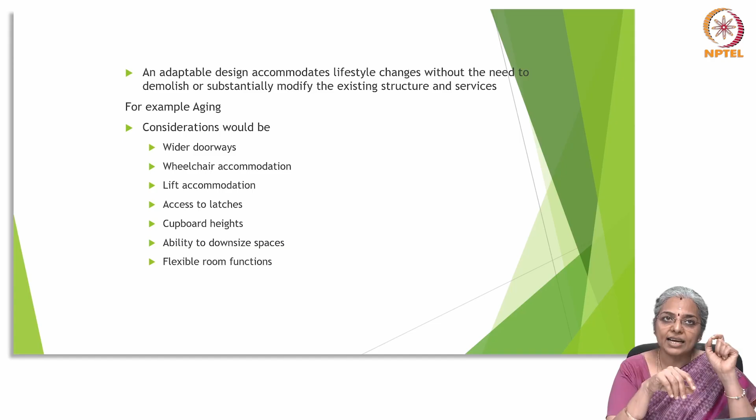So, an adaptable design should accommodate lifestyle changes without the need to either demolish or substantially modify the existing structure and services. As an example, if we are designing a house where the inhabitants are bound to be aging, what considerations should we give? We should look at giving wider doorways, because once they become less mobile, they may need a walking stick or a wheelchair, for which the doorway should be able to adapt.

Then there should be wheelchair accommodation, a facility where people can move within the house freely on a wheelchair. Then accommodation for lift, because sometimes if a person lives on the first floor, when they are young they don't need a lift, but when they become senior citizens, sometimes they may need a lift.

Or even if you look at a small clinic, when it begins to grow and they start moving to the first floor or second floor, they need lifts to take their patients to higher floors. So it should be able to accommodate a lift.

If it's for the aging person, then access to latches. They no longer can actually stretch their hands too far and operate the latches, so latches should be accessible to the senior and the elderly. And the same is with cupboard heights and cupboard handles.

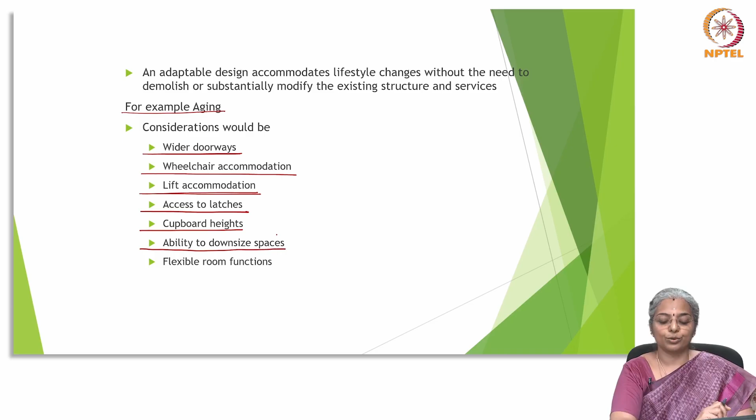Also, as the household starts to shrink, we should be able to downsize the spaces and make flexible room functions.

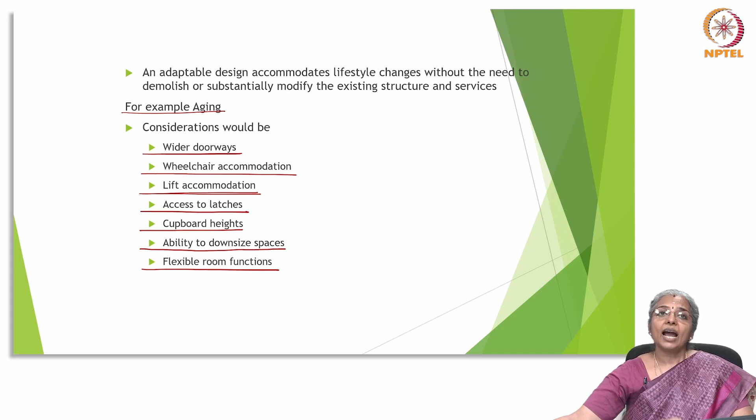Now we will come to another concept also, which is disassembly of buildings. So I'll go back and forth on these two terms. A disassembly friendly design is a very important part of circular construction. In fact, that's one of the first prerequisites for circular construction, in which waste can be minimized and it can be optimally recycled.

Now, if buildings were deconstructed instead of demolished, the consumption of construction material can be reduced, and because of that, the depletion of primary resources will get reduced, because of which environmental hazards will get reduced, and also climate change will slow down dramatically.

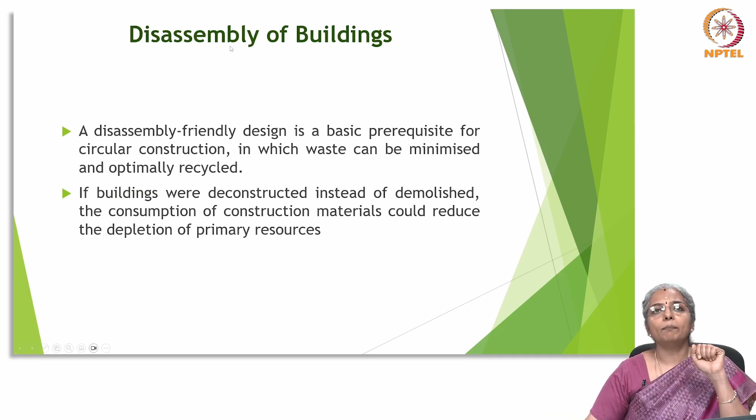Now, why should we aim for complete recovery of building materials? And how can we achieve this complete recovery of building materials? That can happen by, first, documentation of materials and the method of deconstruction.

Second, when I say documentation of materials and methods of deconstruction, it could even be that you actually have to start your designing and drafting for deconstruction, and then give a plan for how the building would actually look when it is put together. So you are actually doing the reverse of what we are doing now.

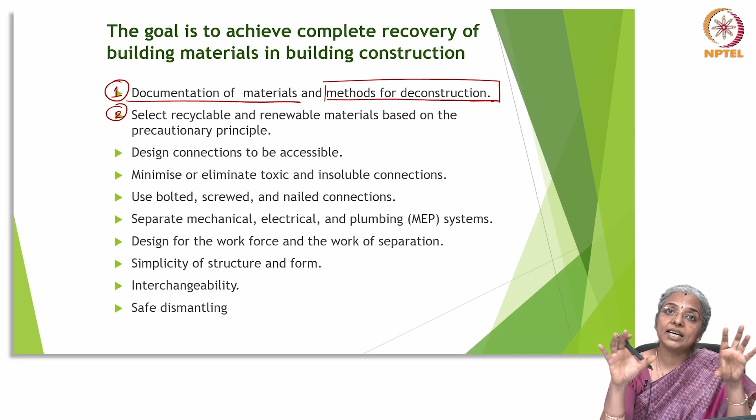Today we design, we build, and then once the use is over, we demolish. But here what I am saying is, you first look at how you are going to deconstruct a building, and then look at how you put it together to achieve the design that you want.

Second is to select recyclable and renewable materials based on the precautionary principle, so that you don't have to waste too much of it when you deconstruct, and you are not causing too much environmental damage and hazard. Very, very important.

Third is design connections to be completely accessible. So you can't have an element in a building and then not know how to dismantle it. You should know the joints and they should be clearly visible, and that is when it can be dismantled.

Fourth is minimize or eliminate toxic and insoluble connections. So what that basically means is components should be dismantled easily without applying anything that could be toxic, or anything that could be so rigid that it is difficult or impossible to dismantle.

Therefore, use bolts, screws and nailed connections so that it can be easily dismantled, it can be visible, and it will be strong.

Sixth is separate the mechanical, electrical and plumbing systems so that you don't have to segregate anything. It's all already segregated and installed in the building.

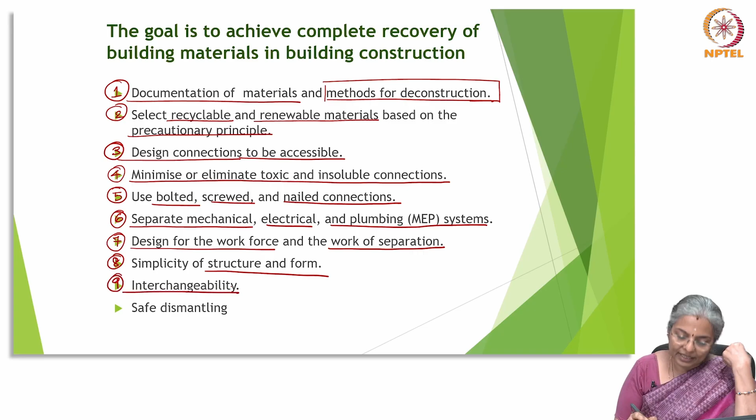Eighth is have very simple structures and form, so it's obvious how you can dismantle it. Ninth is interchangeability and therefore modularity.

Swapping modules should not really change much. And tenth is safe dismantling. While dismantling, it should not cause hazard to the human being.

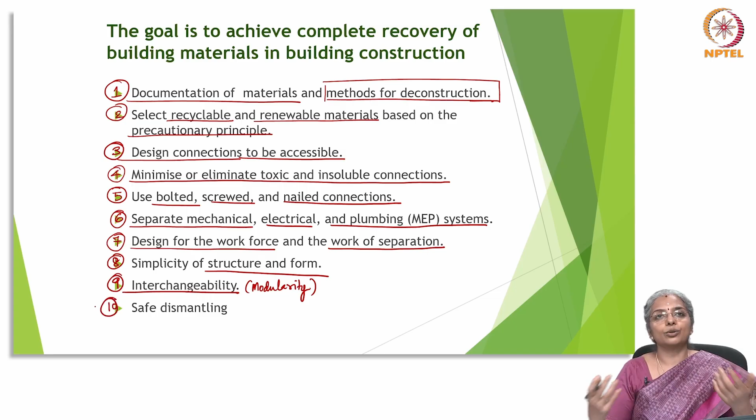Now, what all can design for disassembly lead to? First, it can make designing very flexible for multi-use, so more people can use it. Second, it should be retrofittable.

If any panel or board is damaged, or say for example any tile is damaged, you don't have to remove the entire flooring, you can replace only that tile. That is retrofittability. And then deconstruction of the entire building should happen easily.

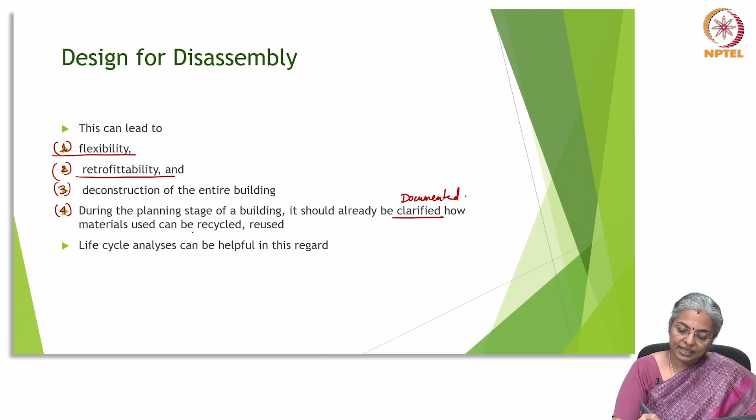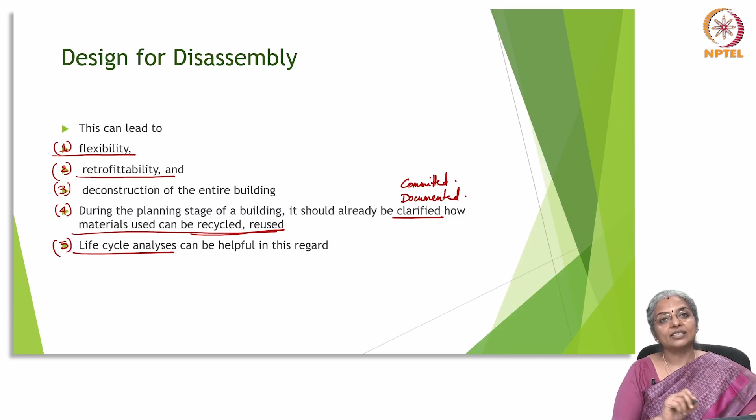During the planning stage of the building, it should already be clarified or documented, even committed, on how materials can be recycled and reused. In this case, life cycle analysis can be very useful.

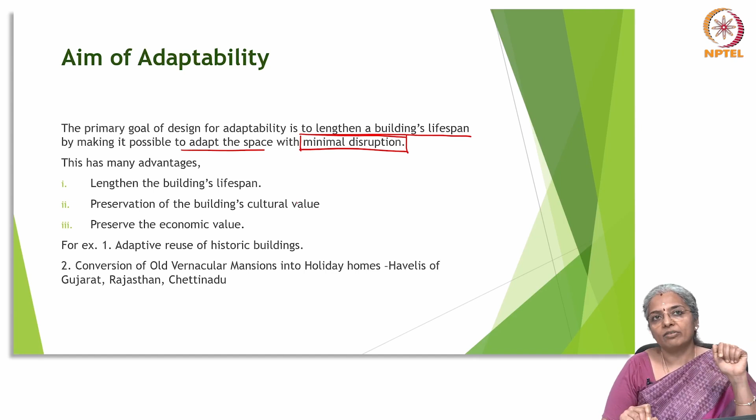Now, if we look at adaptability, why should we go for it? What is the aim? The main aim of design for adaptability is that we should be able to lengthen the lifespan of the building, because we will be able to adapt the space with very minimal disruption.

What are the advantages of adaptable design? First, it can lengthen the building's lifespan—you don't necessarily have to demolish a building to suit future requirements or use. Second, you can preserve the building's cultural value and sentiment, because you are not pulling down the entire building. Third, you can preserve the economic value, because demolition and rebuilding can be a very expensive exercise.

An example concerning point number two is adaptive reuse of historic buildings. Let us look at a couple of case studies. For example, old vernacular mansions getting converted into holiday homes, such as the Havelis of Gujarat, Rajasthan, or even the houses of Chettinad, which undergo adaptive reuse.

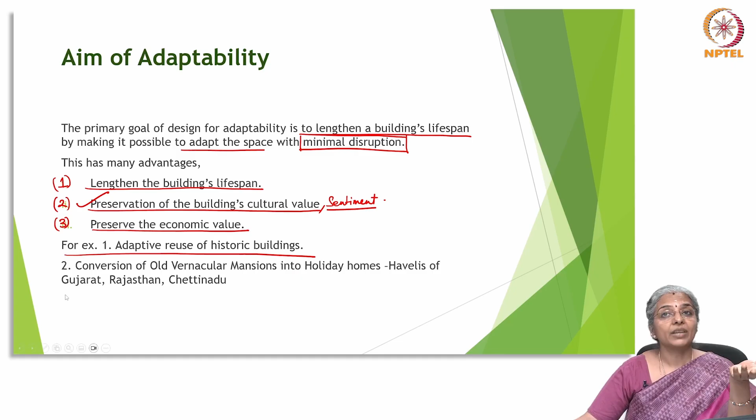One of the easiest ways to consider adaptability is to go for adaptive reuse. Let's look at the example of the Alembic heritage development at Vadodara, which got converted from an industry to a cultural center, because Alembic is a very historic pharma-related company with a big history. This development hosted the Alembic Museum, art studio, exhibition and display spaces.

This was established in 1907, ages back, and it has been growing ever since, which means it's an important piece of history, architecturally as well as in the history of industries.

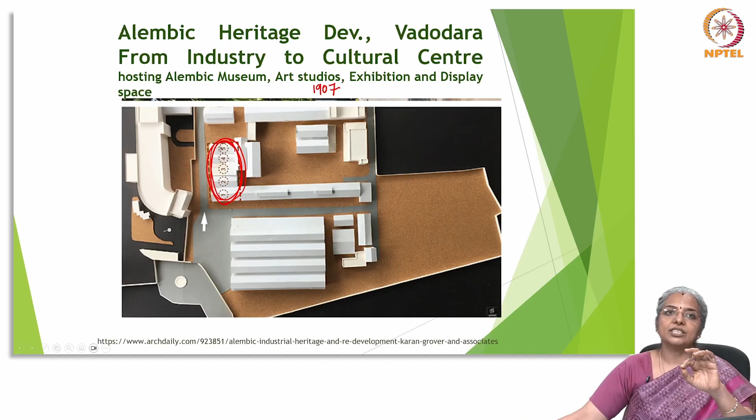So it was quite a challenging project, and the architectural purpose was to look at this more as a sculpture, to maintain the true quality of the building when you look at the materials, the spatial quality, the language of its architecture, the morphology of spaces.

What they did was use sand blasting or water jet treatment to remove all the plaster from the brick, and the moss that was found in many areas, because the plaster was anyway peeling and falling off and would have continued that way. So they wanted to remove the damaged plaster.

Then another major design element was the roof. There are a few structural details that are very interesting. The trusses are riveted as against being welded, and the detail of the riveted truss is that the riveting is very finely done. Many of the trusses were actually in very good condition, and only a few needed some strengthening.

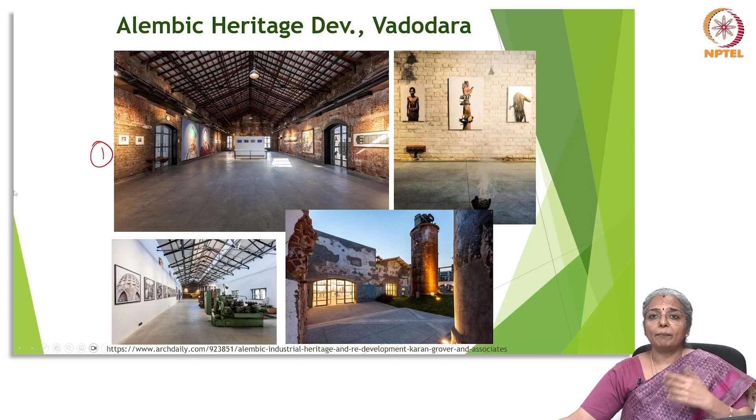This redevelopment is actually only in one small part, and other parts will be redeveloped probably in due course. So designing the exhibition space happened in this block, and the intention was to develop a spatial distribution for exhibition by only providing roofing, which is the character of the other blocks, but still the space should be highlighted.

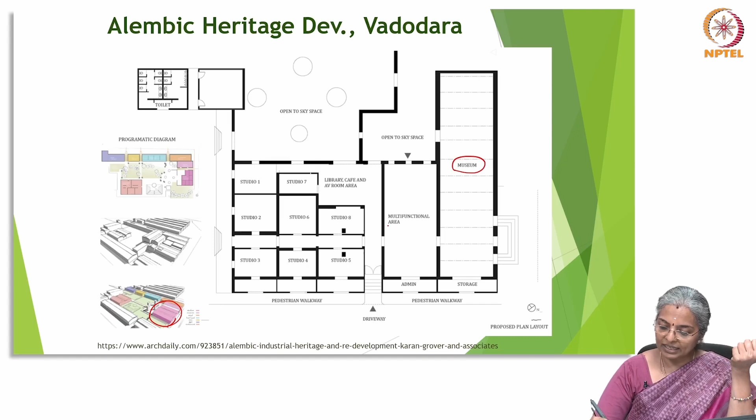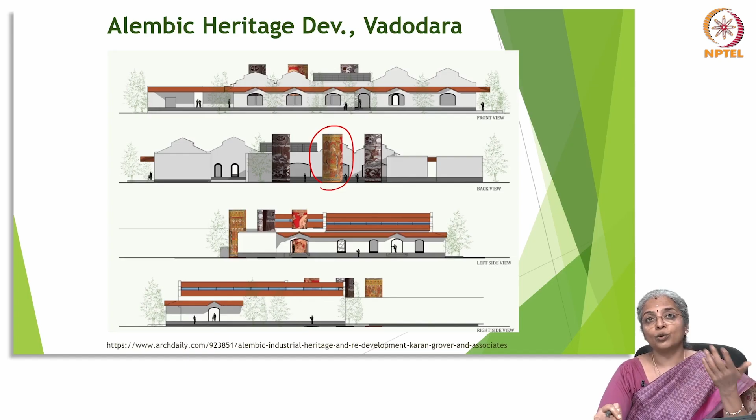You can see that the parts which were falling off, they did not chip off the plaster and remove it, but instead added it as part of the mural — the cracks or whatever look as part of the murals — and this is the final outcome.

We will now see — first, this Alembic is actually an industrial unit. We will now see another residential conversion, taking the example of the Chidambara Vilas in Chettinad. The Chidambara Vilas is actually...

...a 118-year-old heritage Chettiar house, and it has, as you can see, authentic Chettiar house characteristics, which is luxurious in lifestyle. The luxury is in details, and restoration was done by a group called the Sangam group, which also manages this property. So what they did was the rooms were recreated and restored to the smallest and finest details, and at the same time the room has been subtly enhanced with all the luxuries and amenities to offer a very personalized experience, so that you get the best from both worlds.

The beauty of Chettinad is that the architecture is fantastic. The Chettiars were primarily traders who moved away from Chettinad to various parts of the country and the world, so they had international exposure. For example, their mirrors would be Belgium mirrors. They had the finest quality things in their house, apart from their own authentic style of architecture.

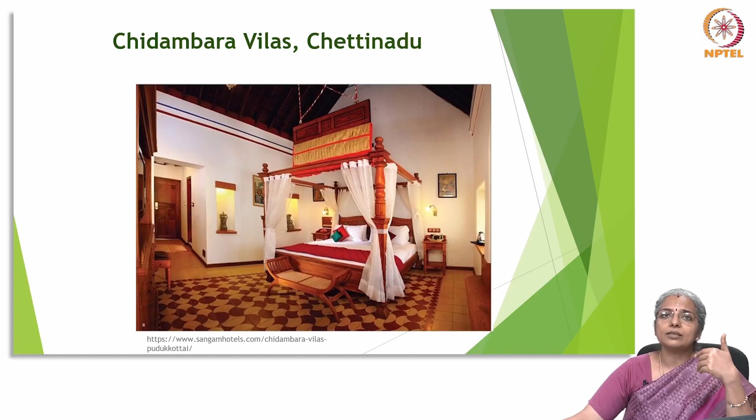This building could have gone for demolition, but they chose to make it more like a resort, including a small swimming pool and things like that, since the house is on a 1 acre area, giving enough space to include all this. Like this, there is potential in so many other buildings for adaptive reuse in India.

Even in Chettinad, here is another house I am showing, just a random house there. But a house could over time get dilapidated if it is not maintained. There are many such structures which have great emotional, sentimental, historic value that needs to be restored. Otherwise we will lose a piece of history, and by demolishing it, you are only wasting the resource already there in the building.

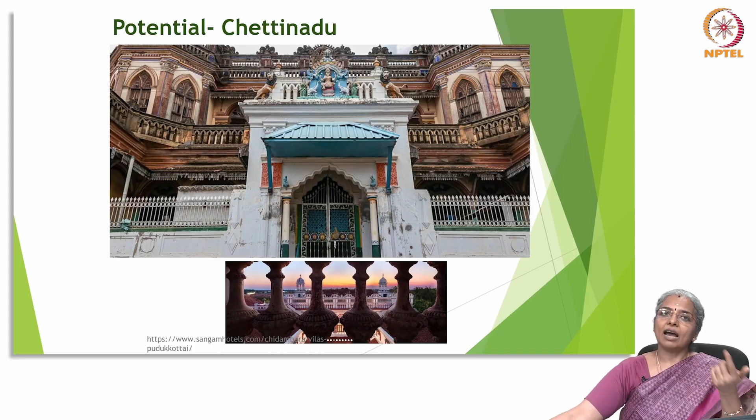So, I leave you with this thought on adaptive architecture, and I will come up with another topic in the next class. Until then, thank you.